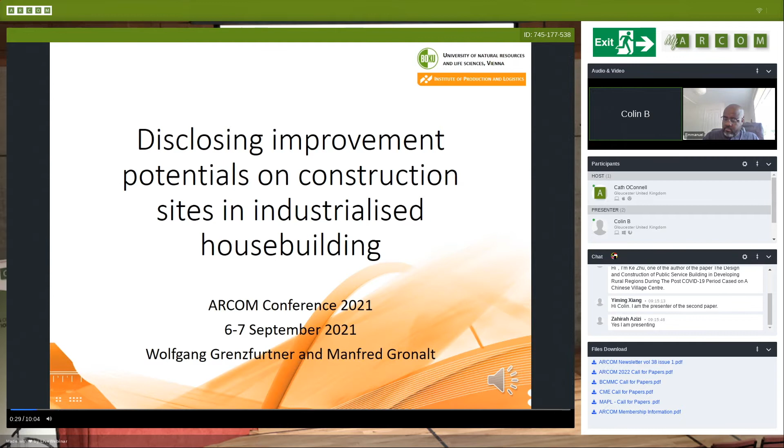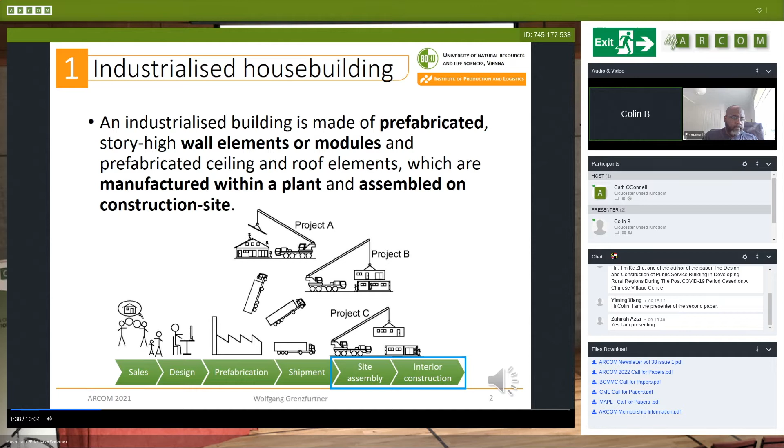During our research, we focused on the on-site part of the production. It is often argued that improving performance of on-site processes with site assembly and interior construction is much more difficult than for the other parts of the industrialized house building order fulfillment process.

When analyzing the current literature, you may identify that there is already a missing investigation that addresses the dissemination of methods for identifying and realizing potential for improvement within construction site processes. Such an investigation may help practitioners and scientists to better understand needs to further develop continuous improvement programs within industrialized house building, and may help find solutions for relevant weaknesses in identifying and analyzing improvement potential.

For this reason, our study aims to analyze the methods and tools used in industrialized house building continuous improvement programs. Weaknesses in current continuous improvement practices, as well as best practice cases, need to be identified and evaluated.

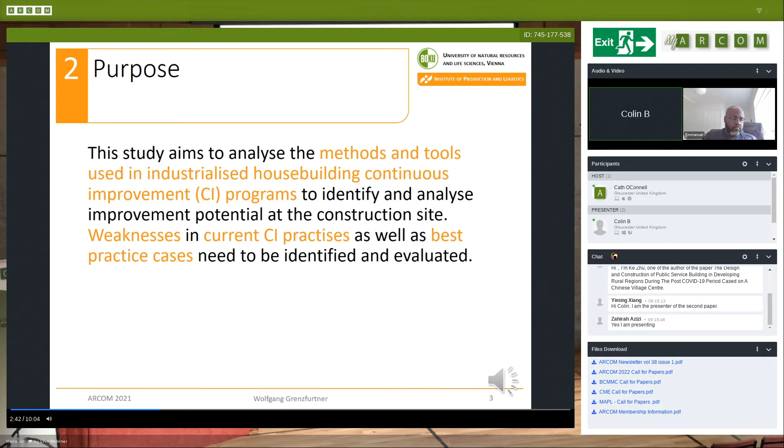To work on this topic, we conducted a multiple case study within the industrialized house building sector. To select cases, we did a qualitative analysis of corporate philosophies provided by the 3 national trade agencies from Austria, Germany and Switzerland, and selected 8 representative cases out of a pool of 76 companies. With representatives of selected companies, semi-structured face-to-face interviews were conducted.

An interview guide with 11 main questions was applied. Answers were protocoled by 2 researchers during the interviews. The analysis of interview protocols was done using the method of thematic coding and content analysis.

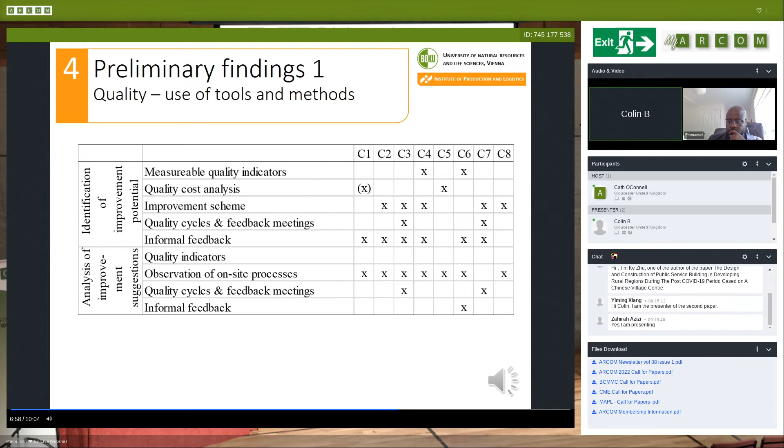However, the application of target actual comparisons to identify specific tacit knowledge of on-site teams is just implemented from case 7. The identified knowledge is used for training of other site teams and for process improvements.

The analysis of improvement suggestions relies in most cases on a combination of REFA, time studies, and qualitative feedback from site observations, feedback meetings, and informal feedback. However, cases 3 and 7, which produce highly customized buildings, and case 6, which serves a short on-site realization period to customers, rely on qualitative feedback.

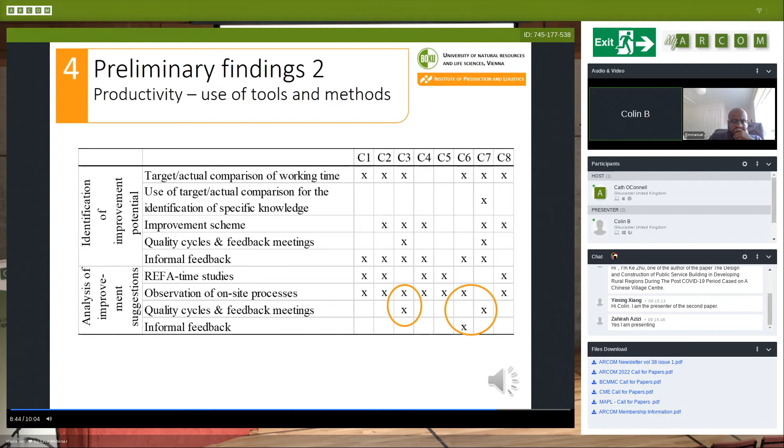Finally, we conclude that companies mainly use experience-based methods for identifying and analyzing potential for improvement in the field of quality. Due to complexity of quality problems arising on construction sites and the missing abilities to systematically measure and assess quality, companies prefer the use of experience-based methods.

Best practice cases were found in the use of measurable quality parameters to identify tacit knowledge of best performing teams, and in the application of quality cost analysis to systematically identify and reduce costly problems.

To improve productivity, indicators such as target actual comparisons of working time are of high importance, which are usually combined with qualitative feedback from construction sites to narrow down the problems and their causes. An exception are companies with a highly customized product which mainly rely on qualitative feedback and do not use indicators.

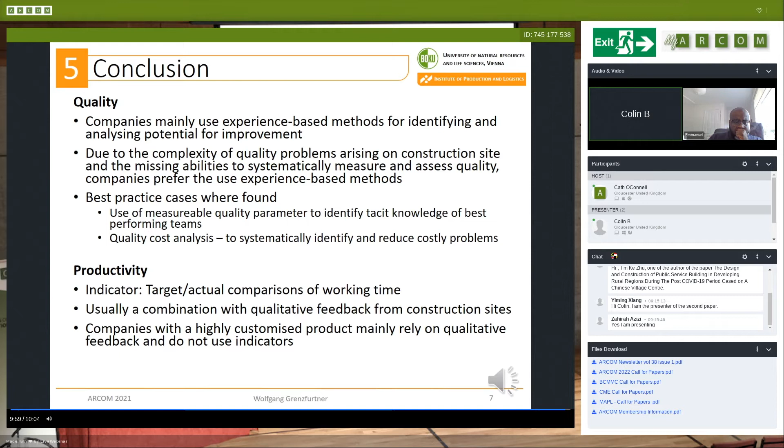Thank you very much for your attention.

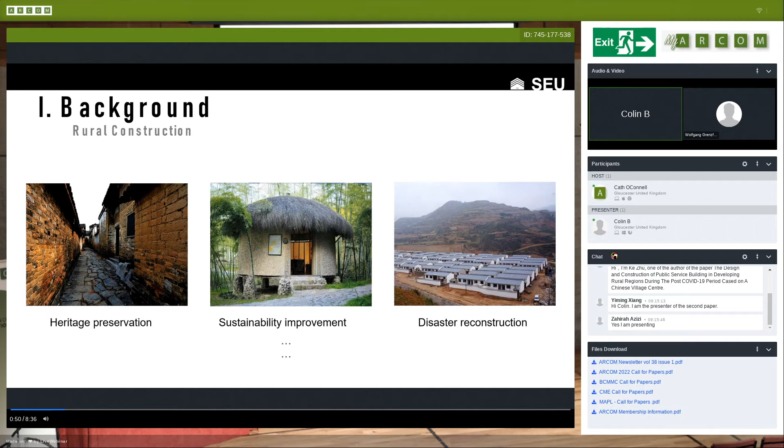This presentation follows a sequential structure: background, method, and results and discussion. This research starts with background research of rural construction. The findings indicated 3 most popular themes: heritage preservation, sustainability improvement, and disaster reconstruction.

COVID-19's rapid expansion and extreme high transmission rate have triggered an urgent demand for medical space. As pointed out by the World Health Organization's report, developing areas are facing a growing threat because of scarce medical resources.

Current solutions aim at establishing treatment space within a short period, relying on modern construction equipment and skilled laborers. This approach would not be effective in less developed regions due to weak industrial fundamentals. Although adequate workforce used to be an alternative in rural regions, the social distance constraint of COVID-19 has prevented delivering projects rapidly with such a labor-intensive construction approach. Therefore, there is an urgent need for developing adaptive industrial construction methods for these places.

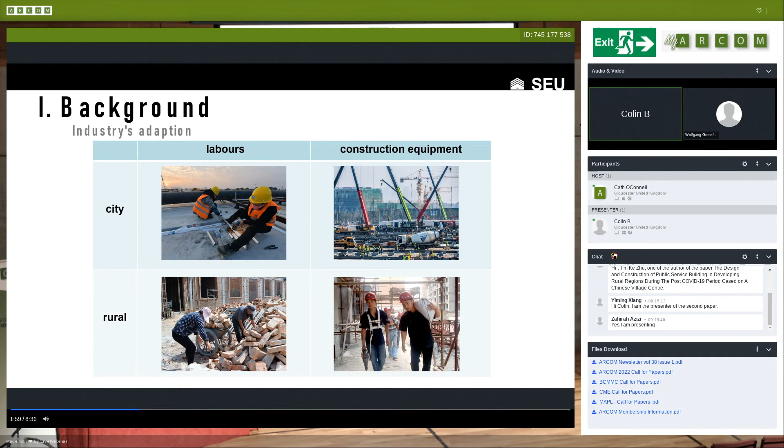By indicating these gaps, this study proposes an adaptive industrial construction method appropriate for less developed rural areas, which fulfills the requirement for both high efficiency and low labor density. A case study of a village center was deployed to test the effectiveness of the proposed method.

This project was located in Jiangsu Province, China. It is a 2-story residential service center with an area of 574.44 square meters. The construction process from December 2019 to January 2021 was recorded and compared with the conventional approach.

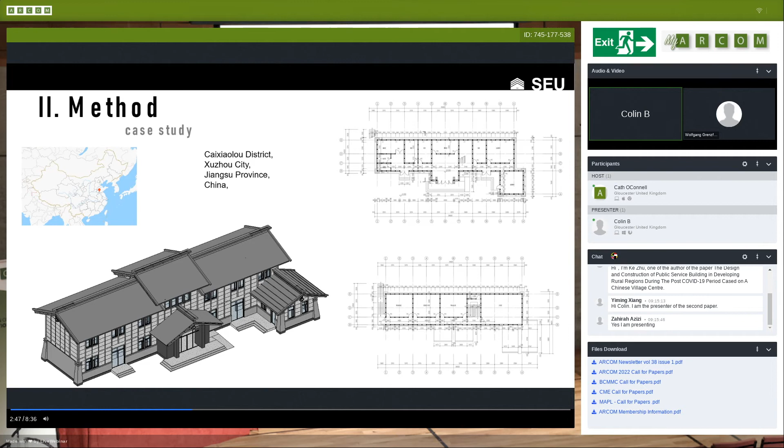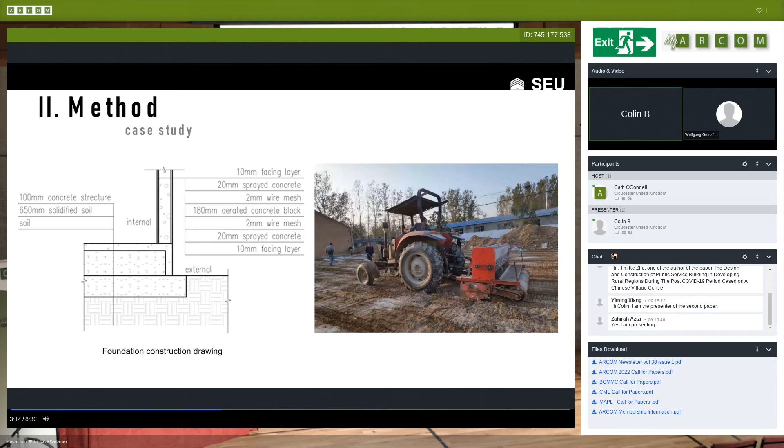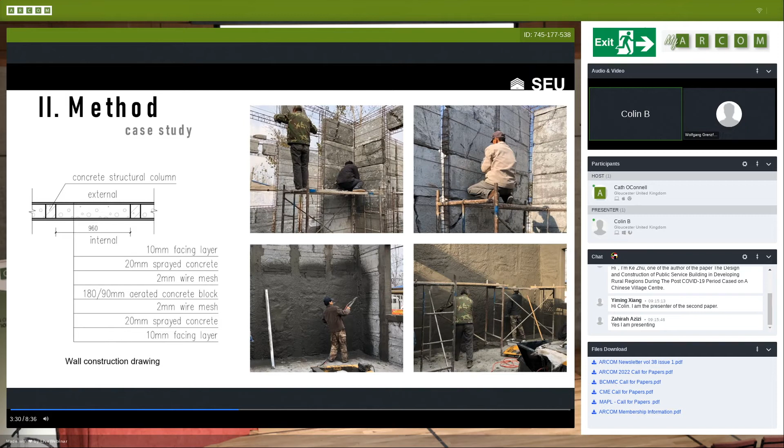The construction process from December 2019 to January 2021 was recorded and compared with the conventional approach. The effect and advantage of the integrated technology were studied through comparative analysis of data collected during the project and simulated data. Discrete event simulation was adopted in this section for its ability to capture interaction and interdependence among complex construction processes.

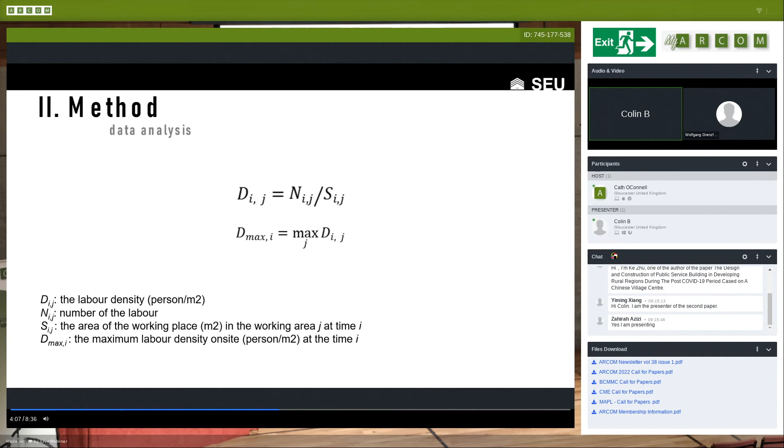The outcomes showed that it effectively decreased labor density and construction quantity, proving it practical for COVID-19 environment implementation. The construction schedule directly compares the proposed approach with two limited conventional approaches.

The process was divided into 5 categories: foundation, reinforcement, masonry, formwork, pouring, and cladding, each taking a row in a graph with a unique color and corresponding labor amount. The figure shows that the conventional approach had to employ 5 to 10 more laborers in masonry assembly and about 4 more laborers in cladding if required to finish the project within the same period, but less workforce was needed for formwork assembly and pouring because the conventional structure has fewer constructional columns.

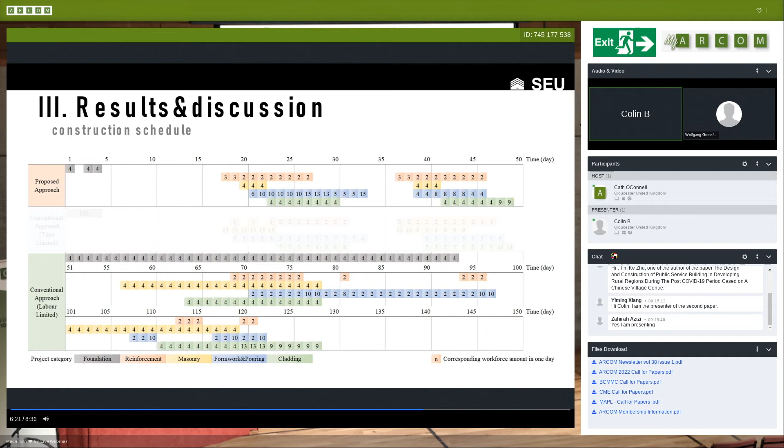In summary, the construction quantity reduction in foundation construction, masonry assembly, and cladding indicated a significant advantage of industrial construction in rural areas.

In general, the labor density was lower when employing the proposed approach. The most significant difference was observed in the first 6 days, during which 11 more laborers were employed in masonry assembly by the conventional approach.

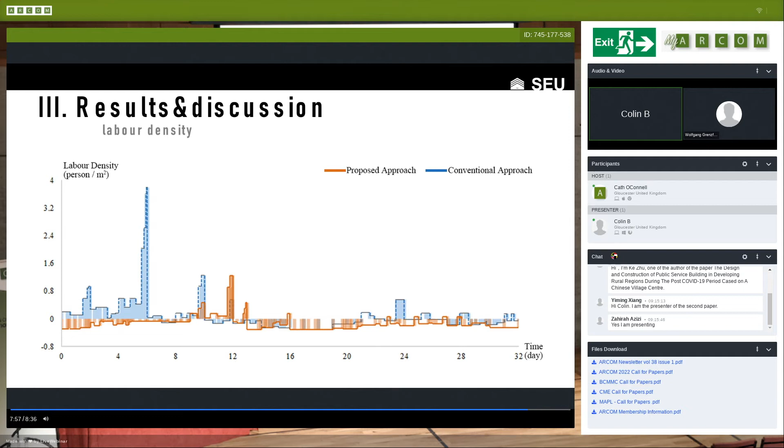Its weakness was magnified when setting the threshold to 0.32. The conventional approach was higher than the requirement for about half of the time, while that of the proposed approach remained below. It means that a 2 meter social distance is harder to keep by conventional construction than the proposed method.

We can now draw a conclusion that with the relative low level...

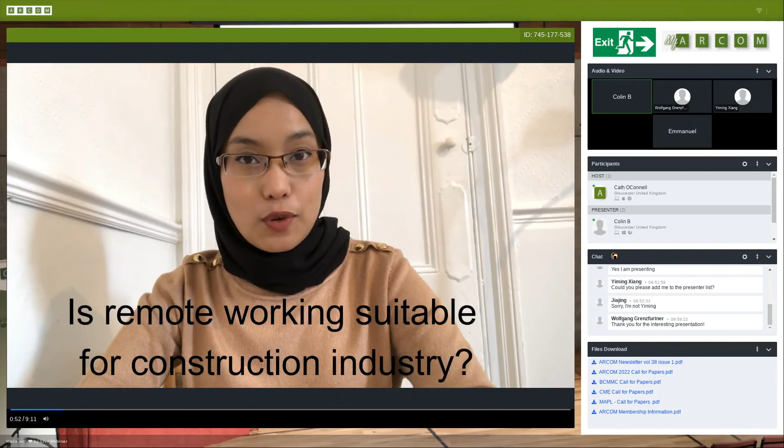Flexible working now seems to be the new norm. I, for one, am glad to be living in the 21st century because we have access to so many different technologies that enable remote working to be a lot easier than it could ever be. For many of us, our phone is like a third hand, and life would be unimaginable without access to the internet. The question is, is remote working suitable for the likes of the construction industry? Because construction is such a physical-based industry, a lot of its tasks cannot be done remotely.

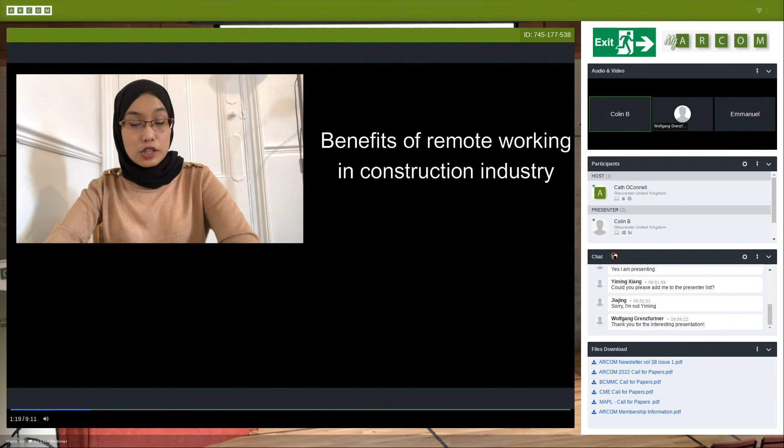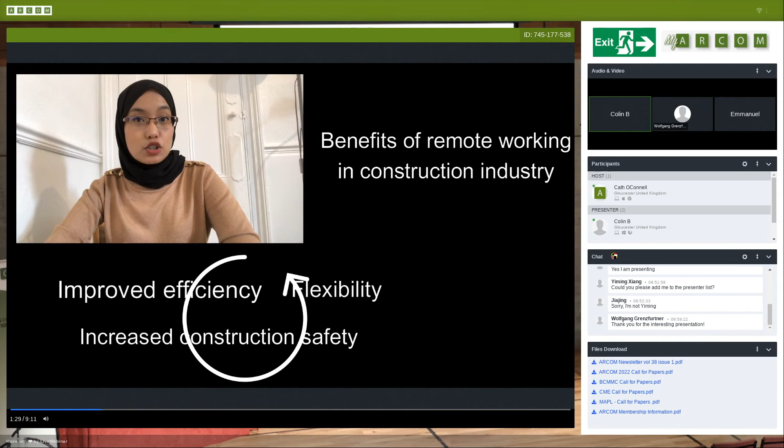However, we've all recently been forced to work remotely because of the COVID-19 pandemic, and this includes the construction industry. Research has documented several benefits of remote working for the construction industry, including improved efficiency, flexibility, and better safety, enabled by various technologies offering capabilities such as automation, cloud computing, and virtual collaboration.

In this study, we use the lens of Affordance Theory to look at the affordances and constraints of remote working in the construction sector. Affordance Theory provides a lens to understand how technology enhances or offers new capabilities. It's no secret that technology affords us extra capabilities, discussed in many fields such as education, but rarely in the construction context. However, technological affordance is influenced by factors beyond just the technology infrastructure itself, and this is what we look at in our study.

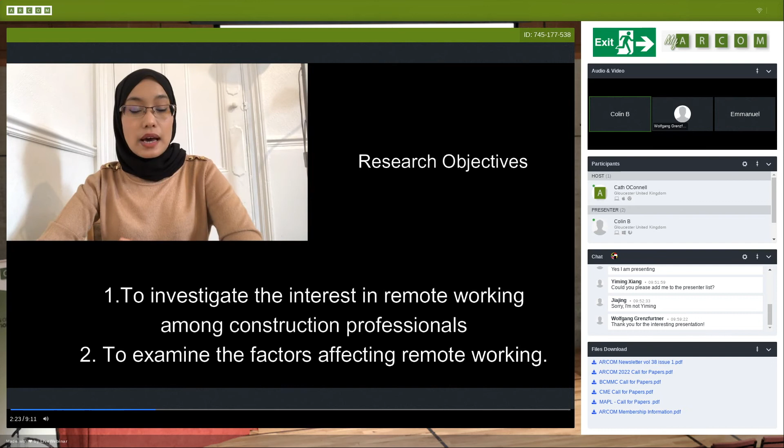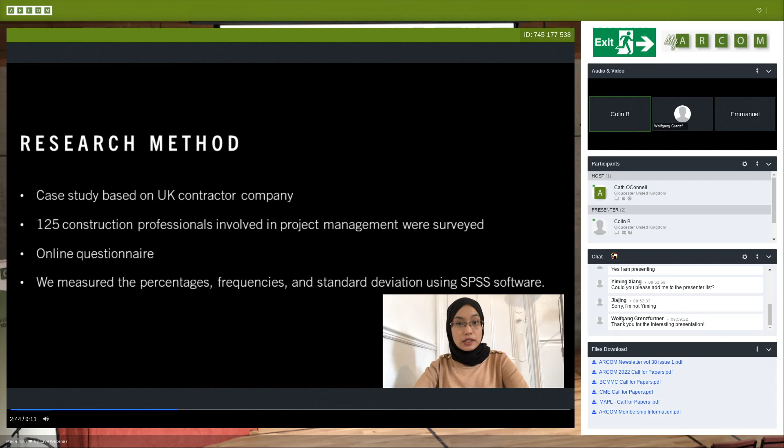In this paper, we investigate how construction professionals respond to remote working and the factors affecting its efficiency and success. We used a case study of a large UK-based contractor, surveying 125 construction professionals in project management roles. Each respondent was emailed an invitation to an online questionnaire, and we had the support of the managing director, who helped encourage participation and sent reminders to complete it.

The data was analysed using SPSS software, taking percentages, frequencies, and standard deviations. We asked respondents about how they perceived remote working, the types of technology infrastructure they had access to, and the challenges they felt while remote working. We found that the majority, 82% of respondents, said they would like to remote work, but very few actually did. Only 34% worked remotely some of the time, and did so occasionally when needed.

24% did remote working consistently at least once a week. We found that 70% of respondents preferred flexible remote working as opposed to full-time remote working, because it allowed them cost savings, less traveling time, improved focus, and made them happier, while also giving flexibility of moving back to a physical environment when necessary.

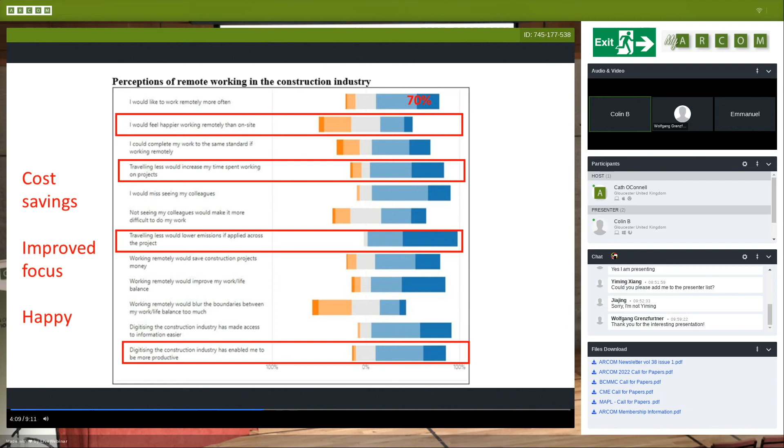79% of respondents believe that remote working would help improve work-life balance, and don't think it would negatively affect boundaries between home and work. With the capabilities allowed by technological affordances, 86% said digitization made information more accessible, and 75% felt more productive when doing remote working. However, 84% said they would miss seeing their colleagues.

This would potentially affect work for 48% of respondents who said lack of engagement would be a problem. When surveying the main challenges of remote working, 73% felt collaboration was a major problem. 84% said they had poor home working arrangements, which affected their ability to work remotely. 48% said distractions at home were a real challenge when remote working.

Most projects had basic technology such as high-speed broadband and portable technology, but only 60% actually used BIM. Only 38% had automated processes in their projects, and only 4% had utilized robotics. On the contrary, 85% believe they have enough technologies to allow for successful remote working.

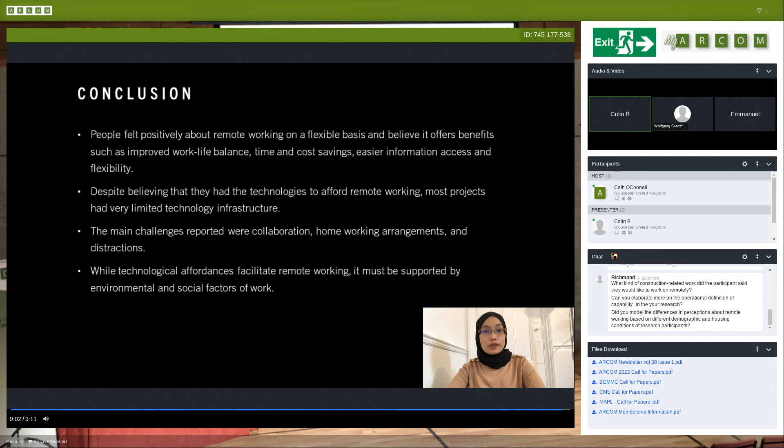For the construction industry in particular, flexible remote working was one that respondents felt strongly about, because it allowed them the flexibility to work from home when suitable and to work in the office when needed. Also because of the physical nature of construction work, remote working has three dimensions: the physical technological infrastructure that allows for different capabilities, the social dimension, and the environmental dimension, which people need to be supported with so they can carry on with remote working more effectively.